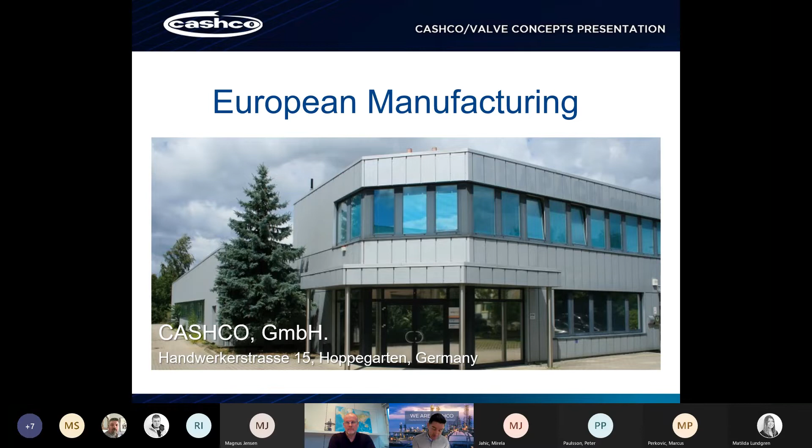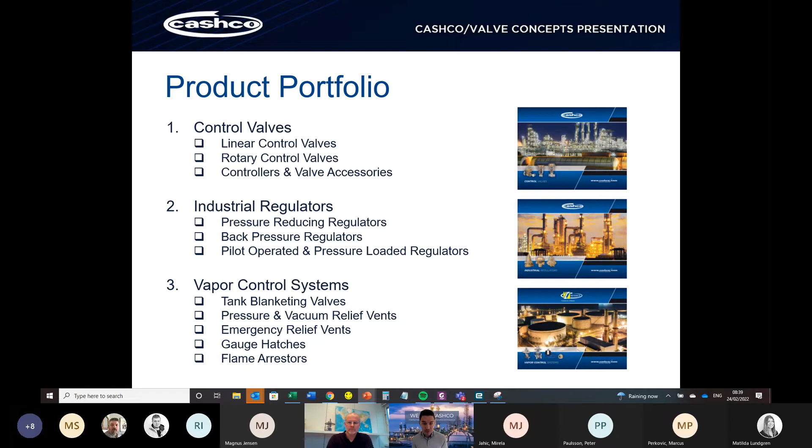So yeah, two facilities mainly across the world. On the video, that's from the US facility, we're manufacturing control valves, linear and rotary control valves, and industrial regulators. The product range that we're going to focus on today is the vapor control systems, which involves tank blanketing, pressure vacuum relief vents, emergency vents, gauge hatches and flame arresters. Essentially, that's all our products that are associated with tank storage, controlling emissions, and protecting the tank.

Vapor control systems, unfortunately I had another video. Hopefully this works - I'll stop it after a few seconds and you can let me know if you can hear it, or I can narrate over it.

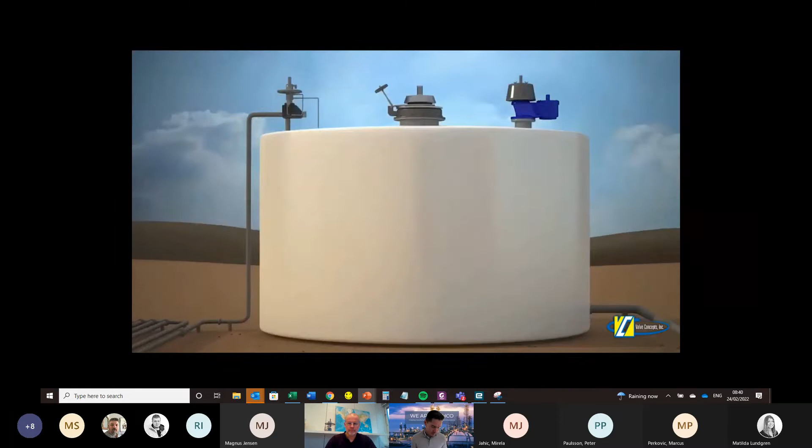You hear that? No, sorry, it's no sound. Okay, no problem, I can talk over it.

The intention of the video was to show you the equipment in situ on a storage tank. Going left to right, we've got the tank blanketing valve, emergency manway in the middle, and on the right hand side, a pressure and vacuum relief valve. The idea of this equipment is to work together to protect the storage tank.

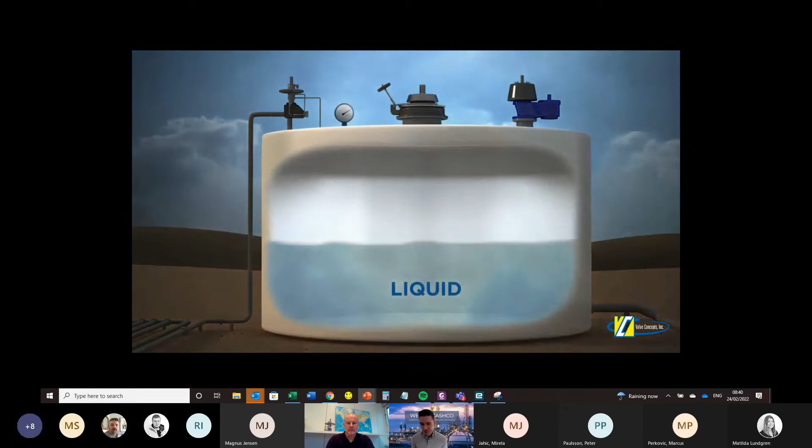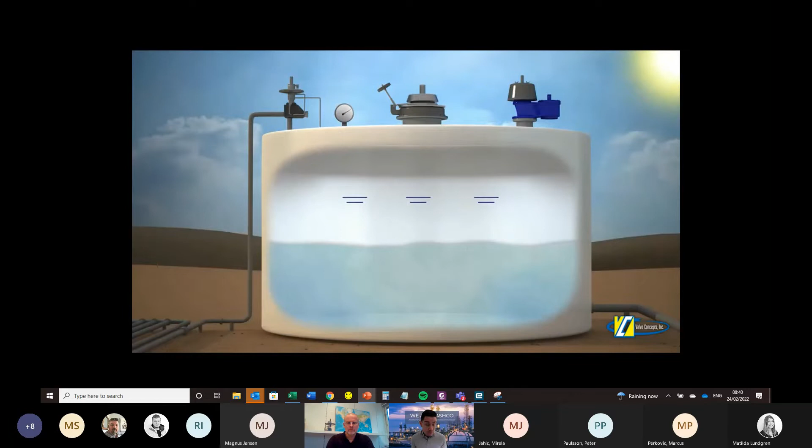As most of you know, there's liquid stored in the storage tank with a vapor space above it. Changes in temperature can increase or decrease the pressure in a storage tank. Throughout the day, if the product's heated by the sun, that increase in pressure will build to the point where you reach your breather valve set point. This allows the vapors inside the tank to breathe, helping to protect it from overpressure. Also, when you fill the tank, the vapor space decreases, pressure increases, and it needs to escape. That's essentially the role of a pressure and vacuum valve.

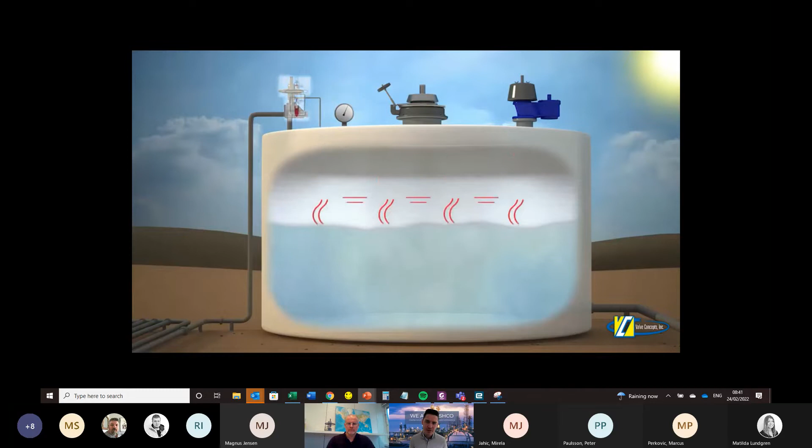You'll see the vacuum side working now. As you're emptying the tank, or as it cools overnight, the pressure will drop. On this tank, we have a nitrogen blanketing valve. As pressure drops, what would normally happen is air would be drawn in through the vacuum side of the valve. Some tanks are fitted with nitrogen blanketing valves, which at this point would push nitrogen into the vapor space of the tank. There are various reasons why you'd want to use a nitrogen blanketing valve rather than just bringing air into the tank, which we can touch on later.

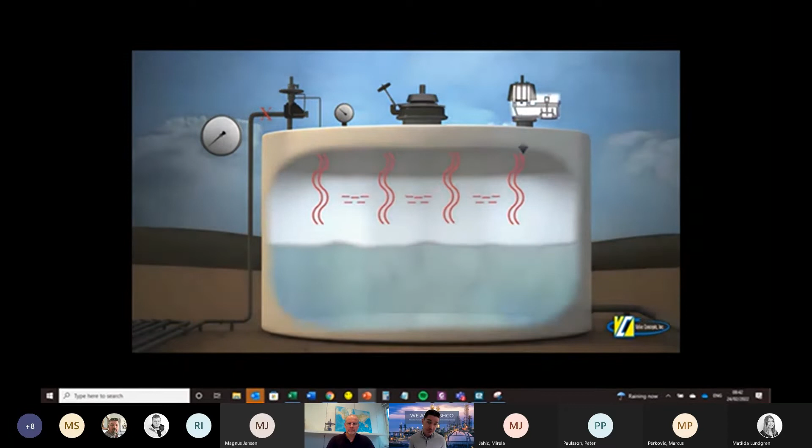You can see that if there is no nitrogen there, with the cross, the pallet on the vacuum side of the valve would lift and allow air in.

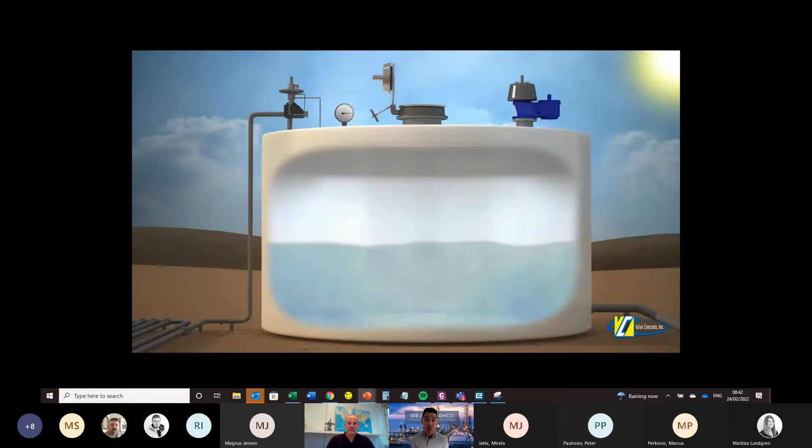The emergency vent is essentially just that, for emergencies. So if you had a fire around this storage tank and the product was heated up quickly, the vapors created are much greater than what can be handled by the standard pressure relief valve. That emergency manway flips open, allows the excess pressure to escape, and it's only there to prevent the tank from overpressurizing and essentially exploding. We'll touch on the products in more detail further into the presentation.

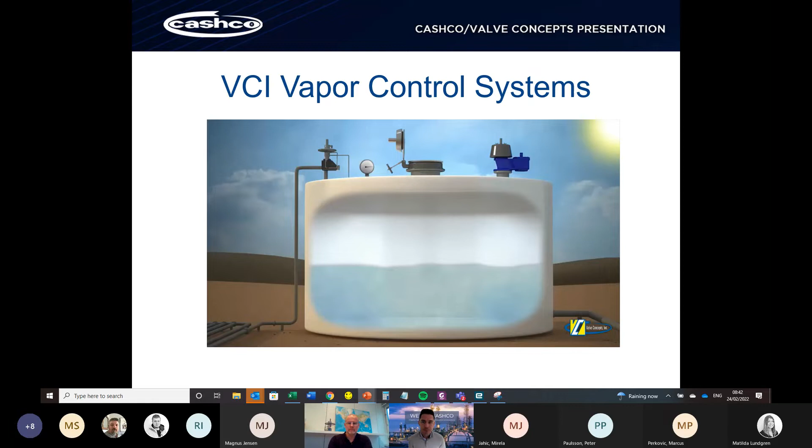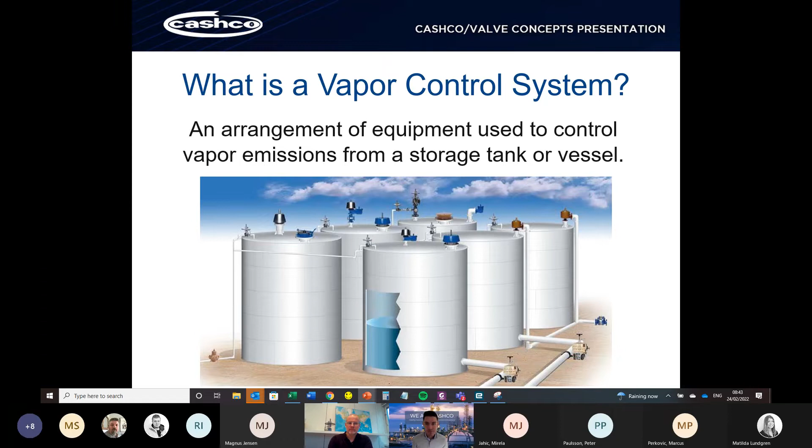So what is a vapor control system? As I touched on, it's an arrangement of equipment that helps to protect the tank and reduce and control vapor emissions. So why do we need pressure and vacuum protection? Well, as we said in the video, they help the tank to essentially breathe during filling and emptying.

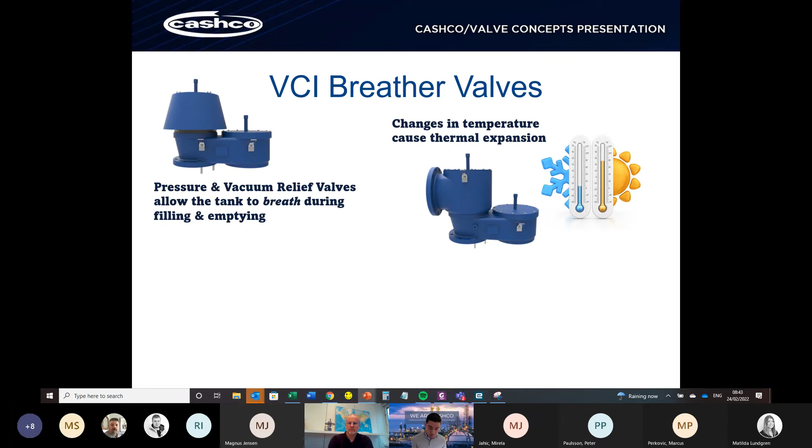As the temperature increases or decreases through the day, the pressure will do the same. That's called thermal expansion, and the valve operates to help protect against that. Most storage tanks are designed for very low vacuum pressures.

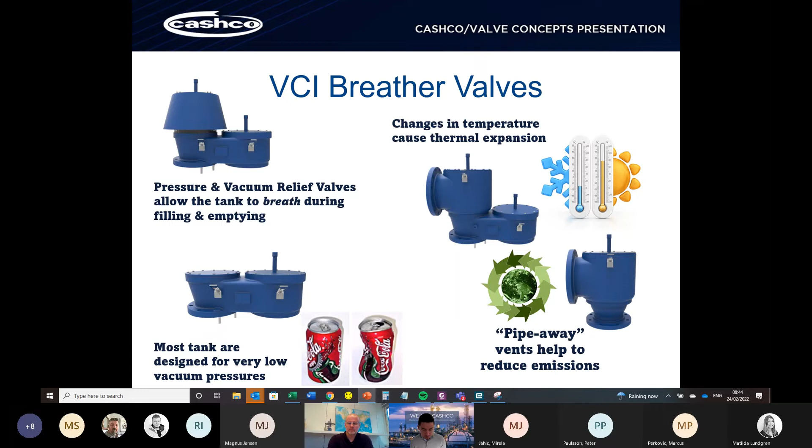How does the valve work? It's quite a simplistic device. On the left-hand side, you've got your pressure pallet that's sat on a stainless steel seat. That pressure pallet contains a diaphragm and backing plate, and we've designed that to try and be as tightly closed as possible up to the set point. ISO sets out some standards for that, which we'll talk about on the next slide.

Most of the valves we sell into this application are what's called weight loaded. So on top of the pallet, you've got either stainless steel or lead weights, which create the set point. Similarly on the vacuum side, on the right hand side, it's a similar design, weight loaded in this case, and both operate as you saw in the video. As the pressure increases, the pallet on the left hand side will lift; similarly on the right hand side for vacuum.

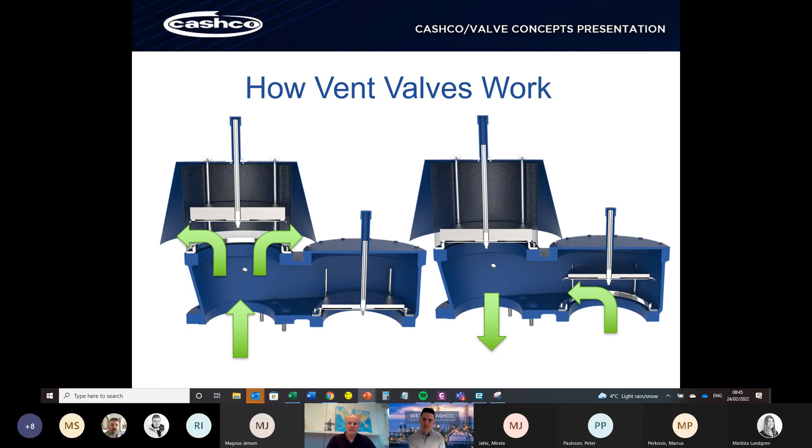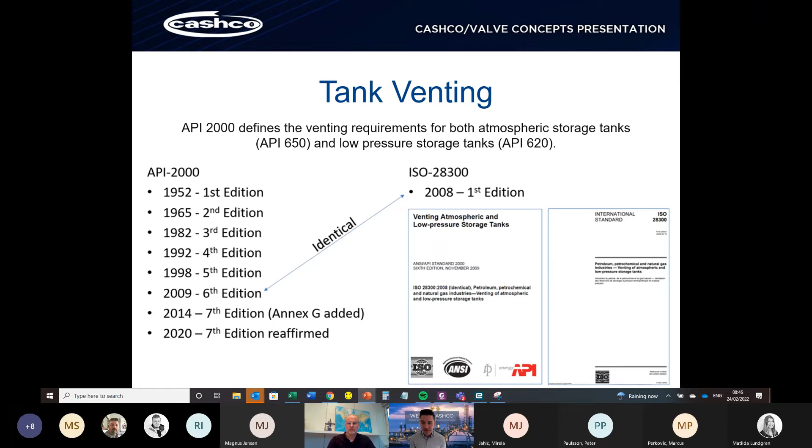As I mentioned, it goes through all the different requirements for atmospheric storage tanks and covers nitrogen blanketing tanks as well on the back pages of that. It's quite a useful document if you're involved in tank storage. Not the easiest of reads, but good information.

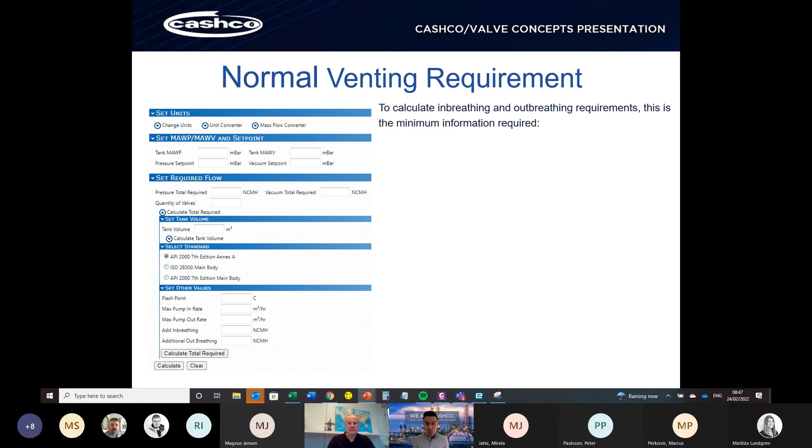So still on normal venting, the image on the left-hand side is taken from our online web sizing program. That's accessible to everybody via the website. It's a really useful, powerful tool that allows you to go on and just do primary sizing specification of a valve. Obviously, we'd be happy for you to, and expect you to, come to us or Raman as the experts and run through this or confirm your thoughts. But if you're just looking to check, is my valve suitable? Do I have the right flow rates? It's a good tool. When you're completing this, there's minimum information that we need for sizing a valve.

The first thing is the design pressure of the tank. Obviously, you can understand why - we're trying to size a valve here that will protect that tank. So we need to know what it's been designed for.

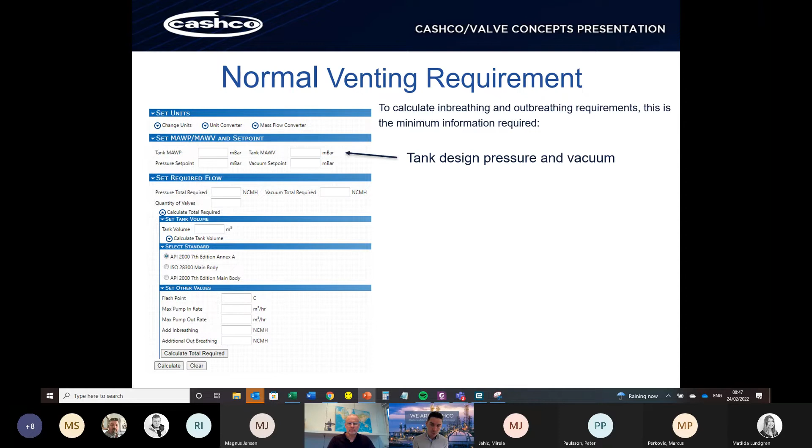Looking at the tank volume, or if that's not known, you can actually put in the tank dimensions and it will calculate the volume for you. That's essential when we're looking to calculate how much vapor or air we need to expel.

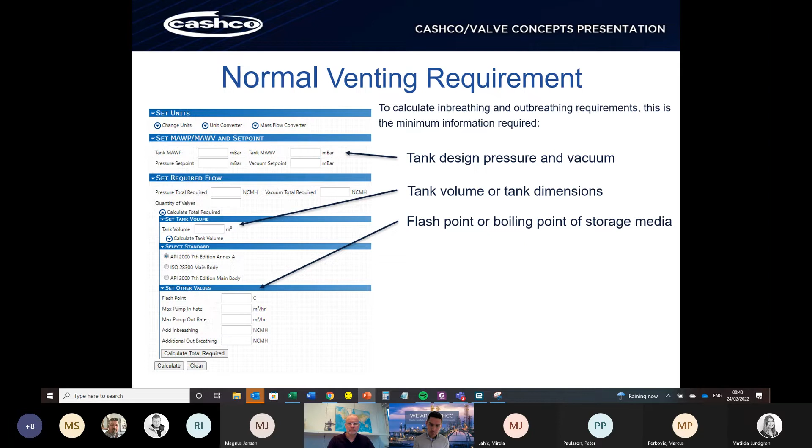The flash point or boiling point of the media is also important with the calculation. When we're looking at the pumping in and pumping out rates, we need to know if that product is going to flash at all. So essentially, those are the 5 criteria for sizing a pressure vacuum relief valve. The rest we can work around and work with you.

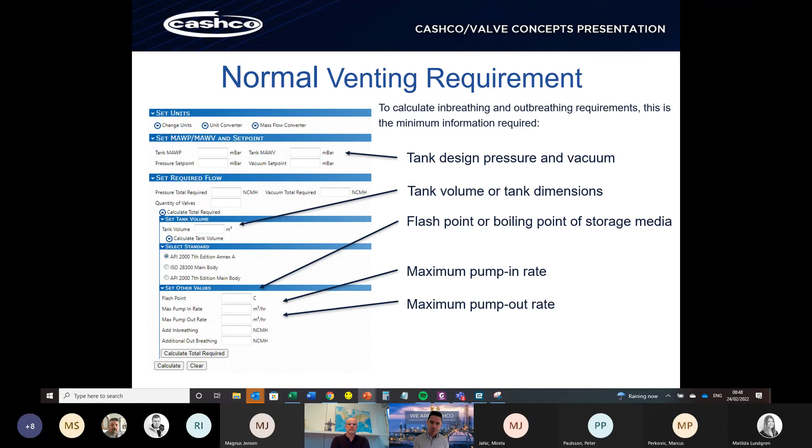This is quite an old slide now, but I think it's still quite relevant. Most tanks do have pressure vacuum relief valves on them now, but not all of them.

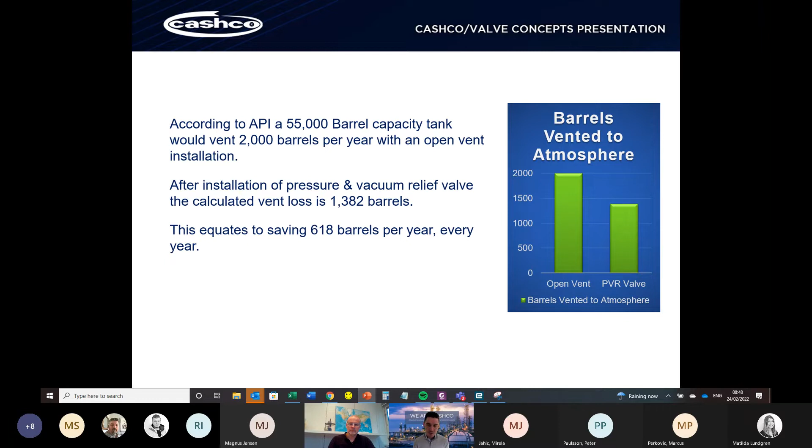API did a calculation to show that a 55,000 barrel capacity tank would vent 2,000 barrels per year if it just had a standard open vent on it. By installing a pressure vacuum relief valve, that was reduced to 1,382, which might not seem significant, but you're actually saving over 600 barrels a year by fitting a PVRV. When you think that the average oil price last year was $55, the total yearly saving just on those 600 barrels is $34,000. So essentially a pressure vacuum relief valve can pay for itself in less than a month.

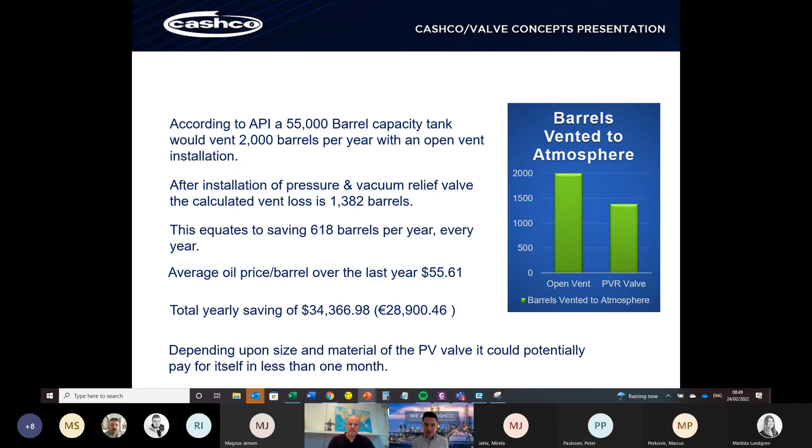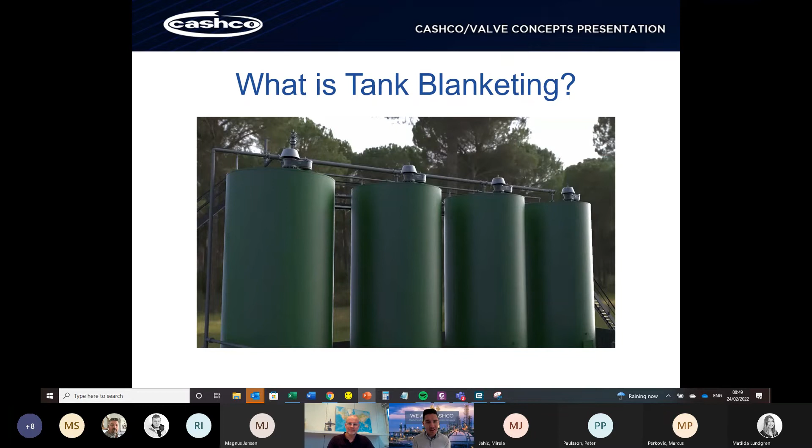So what is tank blanketing? This is a really well animated and narrated video. Unfortunately, you can't hear it, but I'll play it and I'll talk through it.

So this is our model 1078 tank blanketing valve. How it operates, as we said, is to inject either nitrogen - it doesn't have to be nitrogen, whatever gas you wish to use - to create a blanket on top of the vapor.

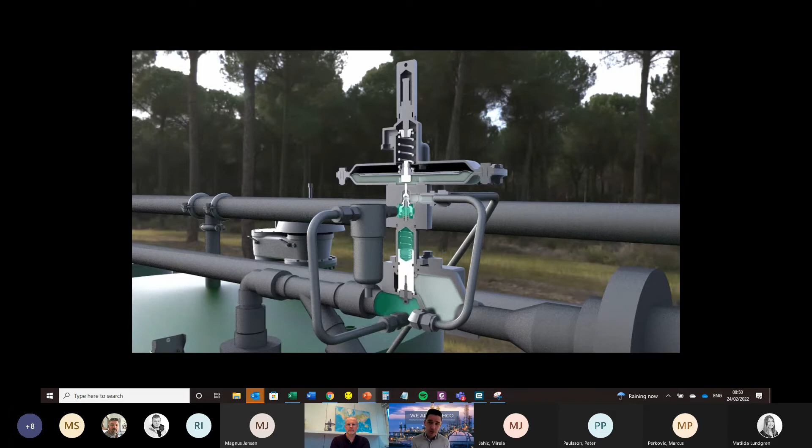It's a very simple design, very reliable. You'll find that in Europe, I believe this to be the best blanketing valve on the market due to its accuracy and reliability.

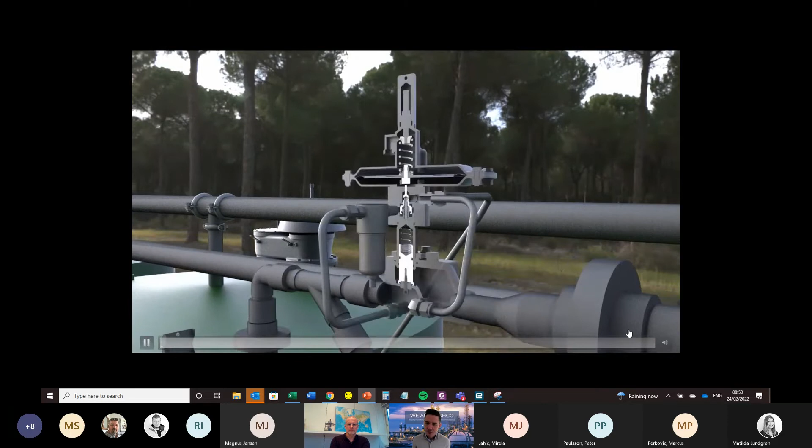How it works is you can see that traveling - what's that, it's the pressure traveling up the sensing line, we call it. That's sensing the pressure inside the tank. Some regulators actually sense the pressure in the body of the regulator, and you're not getting as much accuracy at that point. So this sensing unit goes right into the header of the tank.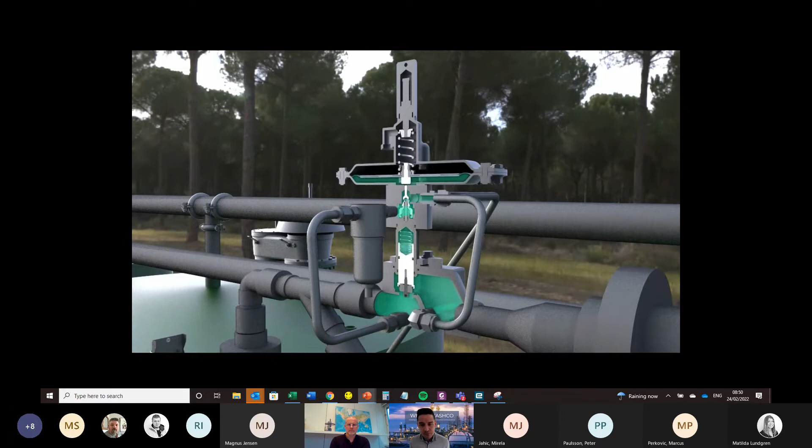As that pressure decreases, the pressure underneath the pallet in the pilot also decreases. That creates the spring to open the valve and therefore push nitrogen into the top of that tank. Obviously, as that pressure then will increase due to the nitrogen, the sensing line will sense that increase in pressure and it will shut the valve off.

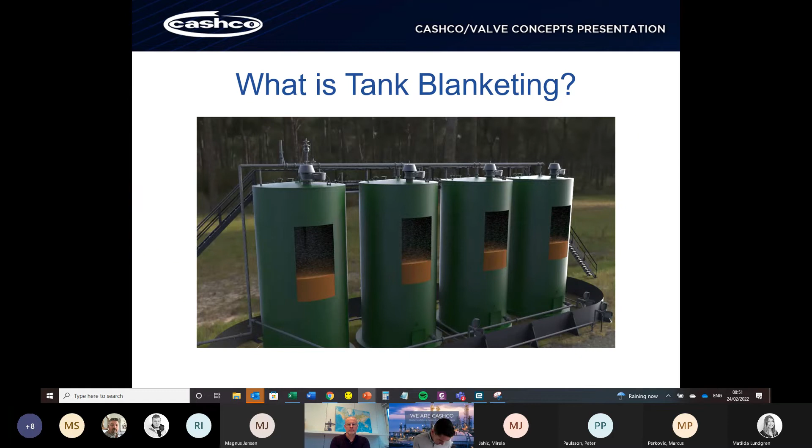They're highly accurate pieces of equipment. Very, very easy to maintain. As I said, they can actually be done in situ - you can calibrate them in situ as well on top of the storage tank. So we'll look a little bit more at the product itself.

So why do you fit nitrogen blanketing? Well, you're keeping air and moisture out of the tank. One of the customers we use produces sugar, where you don't want any moisture mixing with the sugar, so they push nitrogen into the vapor space to take away that moisture.

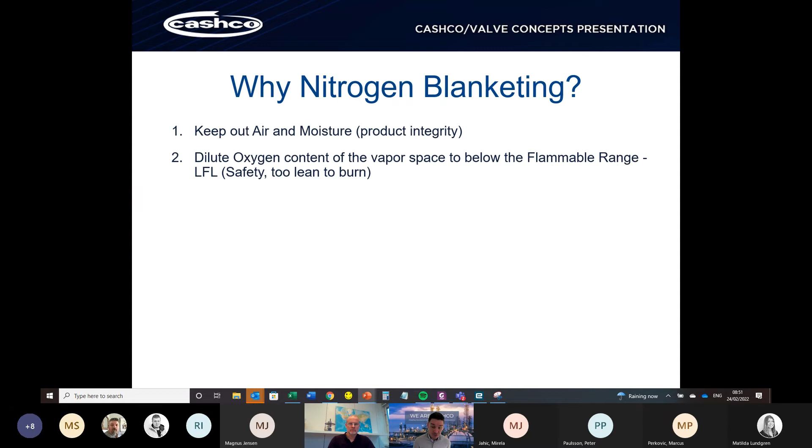You can dilute the oxygen content of the vapor space below its flammable range, so you're making it inert. That's good if you're dealing with flammable products. You can also enrich that vapor space and take it above its flammable range if you want to push in a flammable gas, whatever you're using. So you can use it both ways.

It can dilute toxic vapors for safer emission levels. Everyone's talking about the environment now, and there's a big push on valve leakage globally. So this is becoming a very, very popular product for us and for you as a customer to use.

It also helps to prevent internal tank corrosion. If you've not got air in there and moisture, obviously you've not got that possibility for corrosion.

As I said, the requirement for tank blanketing can be found in the ISO 28300 standard, Annex F, which is an informative standard. It gives guidance on how you use tank blanketing, what the requirements are, and what extra protection is required. Again, we don't expect you to go away and read all that - that's just the standard we adopt as a manufacturer for specifying.

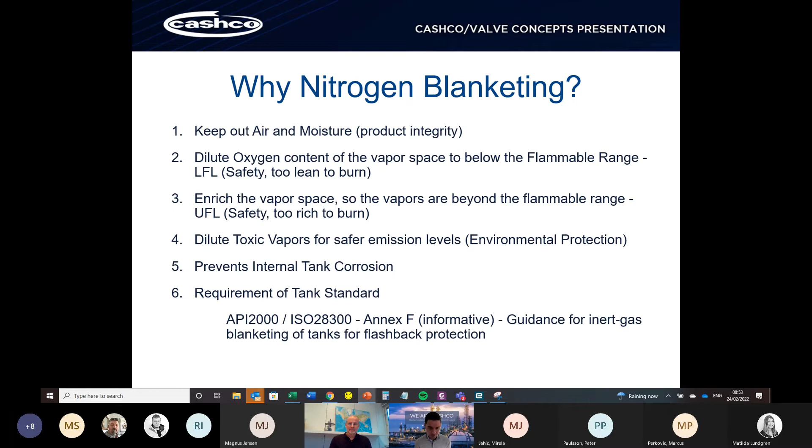So, important factors to consider when fitting nitrogen blanketing. The first is that it's got to exceed the breathing requirements. When you're pumping out of that tank, we calculate the breathing requirements, and the amount of nitrogen that valve lets in has got to exceed the in-breathing requirements before you allow air into the tank. Otherwise, it's mitigating everything you're trying to achieve.

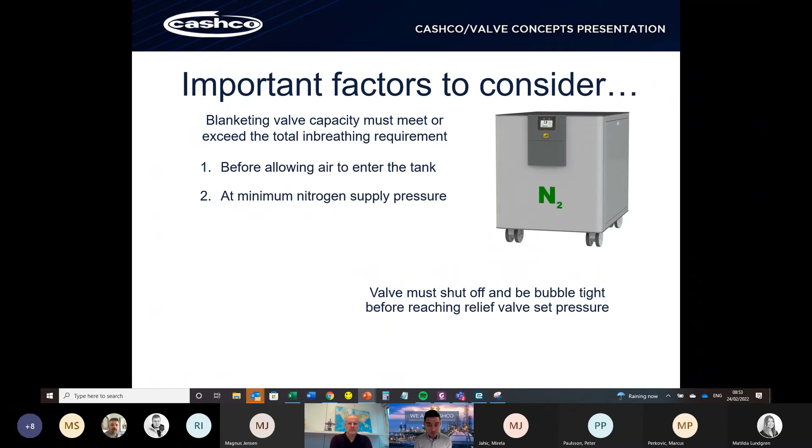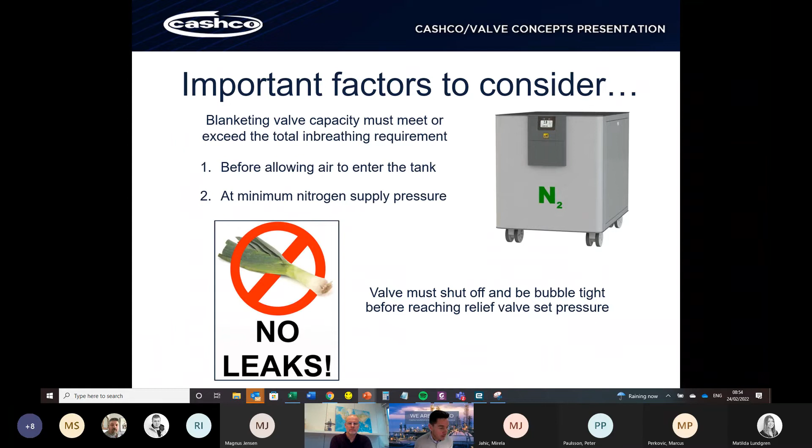It must also do that at the minimum nitrogen supply pressure, so if you came to us for a nitrogen blanketing valve, we'd be asking what your supply pressure is. The valve must also shut off and be bubble tight before reaching the relief valve set pressure. As I mentioned at the beginning, we're looking at a control system, and we need to know how they operate with each other. If they're not bubble tight, you could get leaks on the valve itself.

So we have two models for this. On the left-hand side is our model 1078. As I've touched on, it's known throughout the world as effectively the best regulator on the market - unrivaled accuracy, very easy to maintain. Our valve is bubble tight at shut off. Some manufacturers go above set point; they have a closing pressure. We don't - what we say it shuts at is bubble tight.

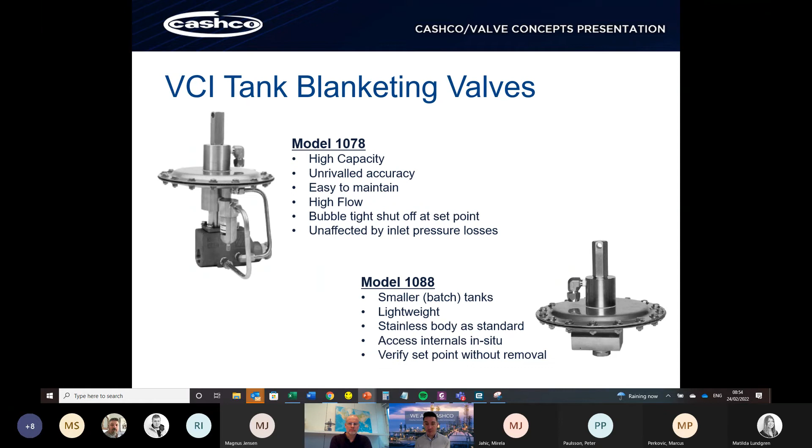For smaller batch tanks, we use our model 1088 on the right hand side. It's a bit more lightweight, easier to access. The capacity is obviously reduced in that unit, which is why it's for smaller tanks.

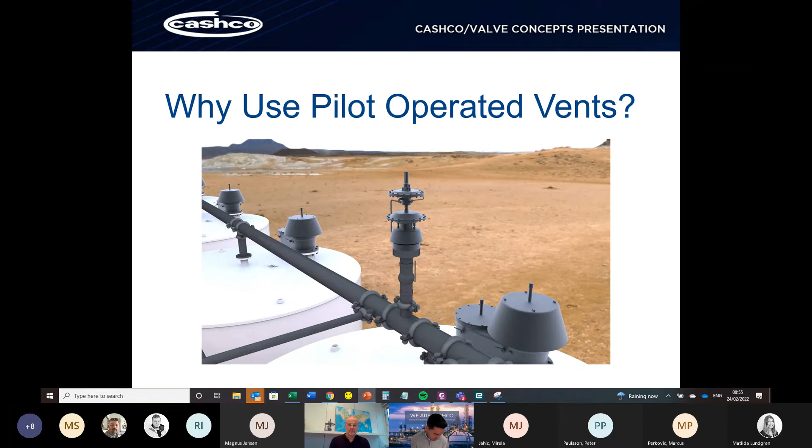So moving on swiftly, we're looking at pilot operated vents. If you were looking for more accuracy than your standard pressure and vacuum relief valve, this is the unit you'd be looking for.

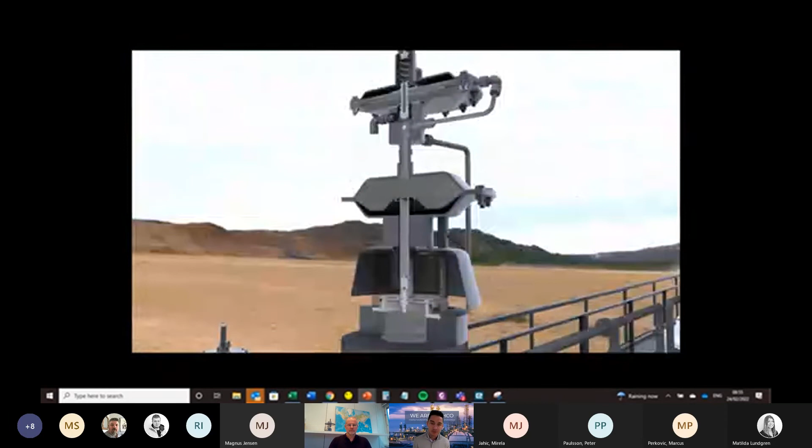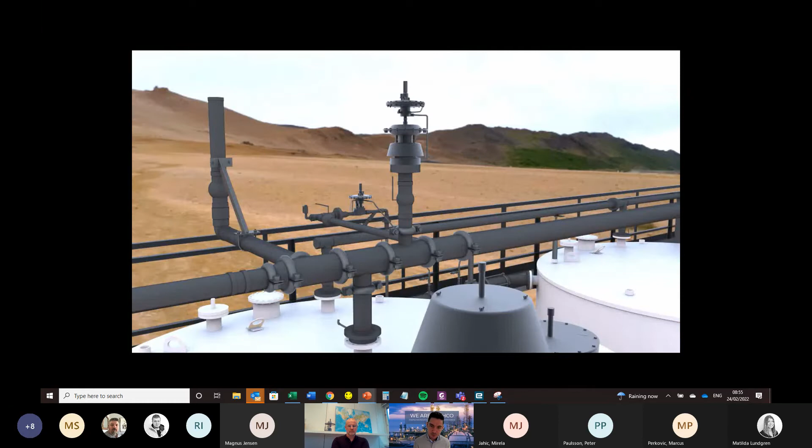Using pilot operated technology, it's the most precise way to achieve your set point. With a weight loaded valve, once it reaches set point, the pressure will increase - you have an overpressure to achieve the flow. With a pilot operated valve, you don't have any overpressure. As soon as this hits set point, it opens fully and you get full flow through the valve.

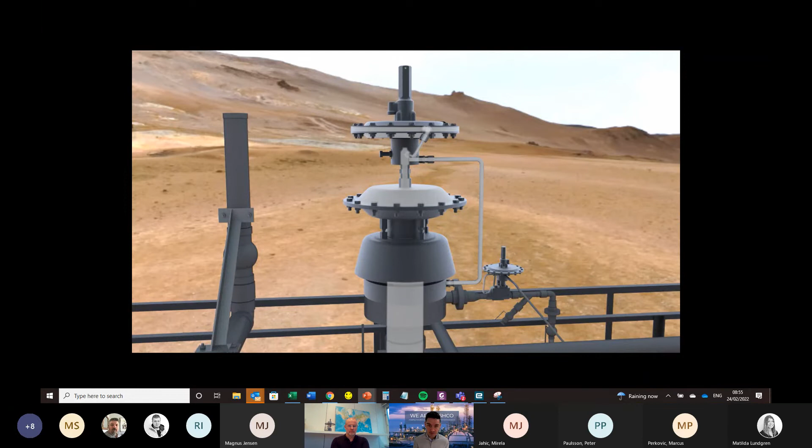The way it operates, you'll see this sensing line that puts pressure above the diaphragm where the seat is, and below the diaphragm on the pilot. What that helps achieve is as that pressure increases, pressure on the seat in the valve also increases, so as it gets closer to set pressure, it becomes tighter. So you get no leakage through these pilot operated valves.

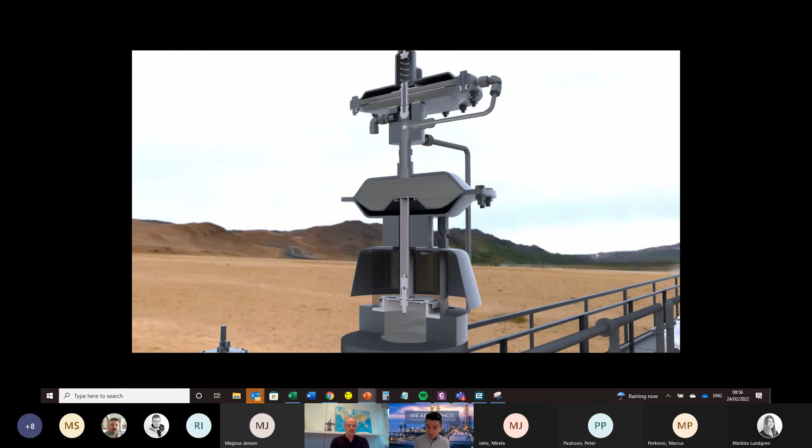So if you are using a particular product that you really don't want to escape, you don't want to vent before set pressure, pilot operated technology is the way to go. Also, if you're looking for full flow very quickly, such as LNG tanks where they're offloading at high speed, this is the unit to go for. As soon as it hits set pressure, you get full flow, full lift.

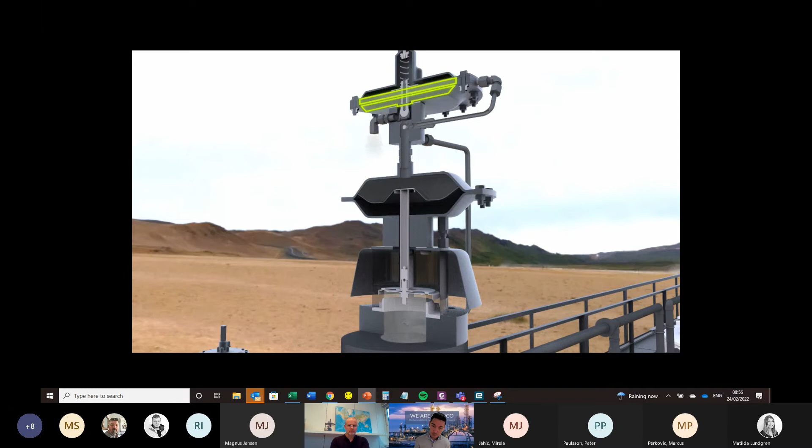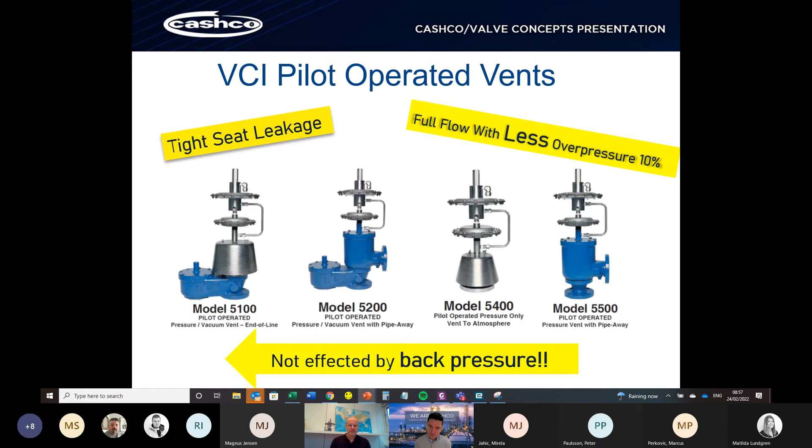So as we've said, what do pilot valves offer you? You've got tight seat leakage or no seat leakage, full flow with less overpressure. You're generally looking at anything up to 10%, you don't even need 10% to be achieving full flow. And they're not affected by back pressure. So on the full blue units, the model 5200 and 5500, where they're piped away, if you add a back pressure in your system, these would not be affected by that. Whereas with a weight loaded unit, that's something you've got to consider.

So these have zero leakage up to 99% of set point. API actually allows for up to 5 standard cubic feet per hour at 75% set point for weight loaded. So you can see the difference. At 75% of set pressure, a weight loaded valve, and that's anybody's, is allowed to leak up to 5 standard cubic feet. So at 80, 90%, it's leaking even more. It's essentially working, it's operating. Pilot valve doesn't do that. At 99% of set point, it's totally closed.

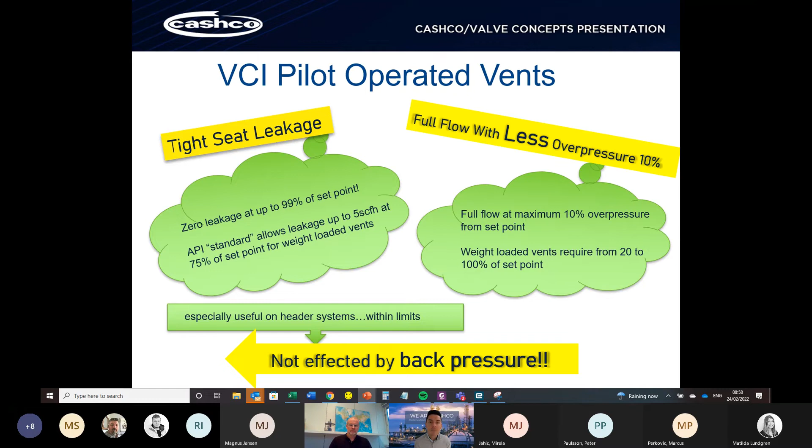Full flow at 10% overpressure, as I mentioned. The weight loaded vent, generally looking to start at 20%, but up to 100% overpressure at set point. To put that into figures for you, if you set your valve at 10 millibar, you would be looking at a minimum of 12 millibar to get your flow up to maybe 20 millibar. And not affected by back pressure, as we said, especially useful on header systems. Emergency venting.

So why is emergency venting required? As we talked about at the beginning, generally for fire engulfment of storage tanks. So these are much bigger openings. These allow for much greater flow in case of fire conditions, quickly heating up the products in the tank and creating a lot of vapor. We do different arrangements of these, from standard weight loaded on the left hand side. We operate spring as well if you've got higher pressures, and we can also add additional vacuum capacity to this unit, which again, when we're looking at full vapor control systems, offers us some good advantages if you've got high vacuum requirements.

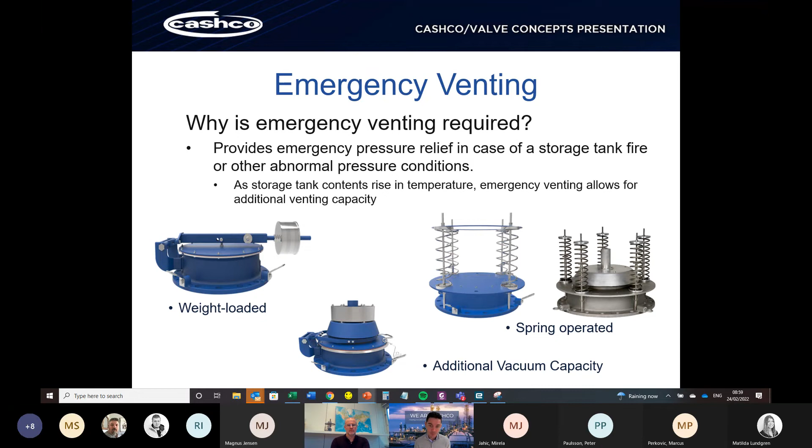What I would say at this point is, if you are looking to specify or size tank storage equipment, it's essential really that you go to the manufacturer with all the equipment and size it as one. It should really be looked at as a complete system, whoever you're working with, because these pieces of equipment do conflict with each other, especially if they're not specified correctly.

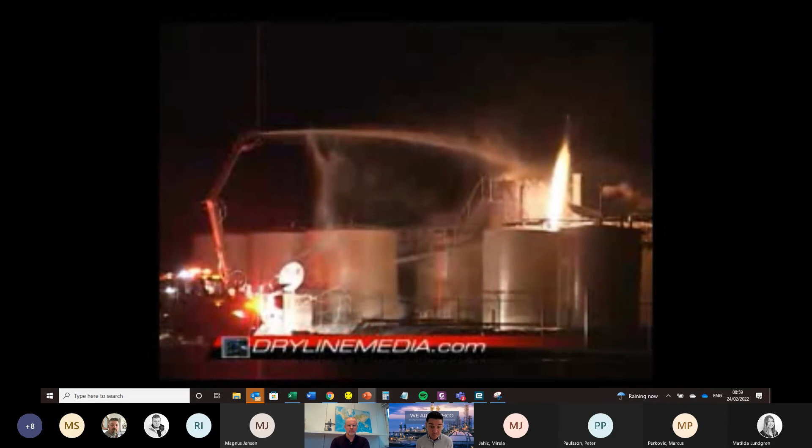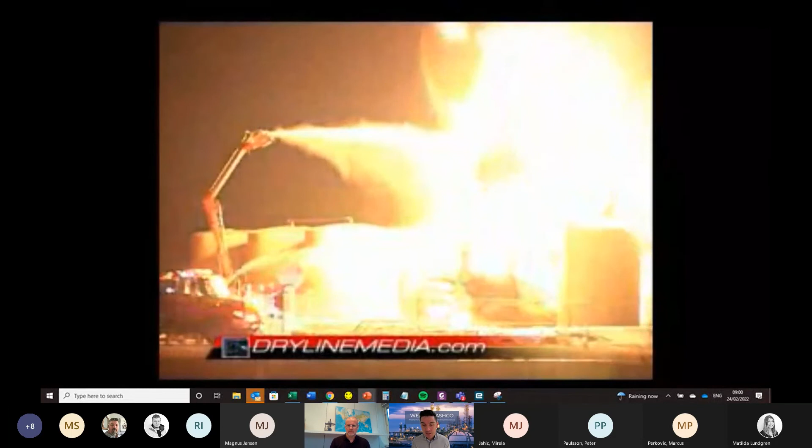Another nice video, we don't actually need the sound for this one. So here you've got a fire engulfment scenario. What's happened is the vapor is trying to escape from this storage tank under high pressure. That's through a normal relief vent. It's ignited because of the fire in the surrounding area. What we'd like to see now is an emergency vent open and let the pressure escape from that storage tank. This tank doesn't have an emergency manway fitted, so the pressure is building and building. And essentially, if the pressure's got nowhere to go, it's going to lift the storage tank with a catastrophic event.

Moving on to just some of the tank furniture, tank fittings that we also manufacture. We've got relief vent gauge hatches. These allow you to access the tank for dipping, sampling, and also, just on the top left hand side, that's our emergency manway in a GRP model. We do plastics, we can do HALAR. We have various options for those, again, if your product is particularly corrosive.

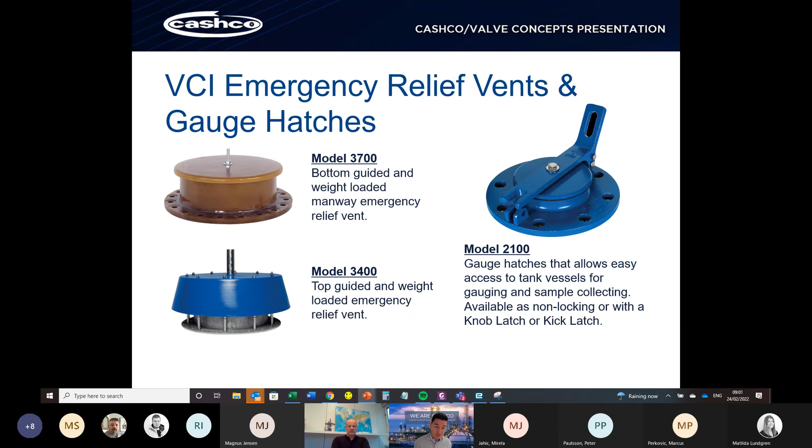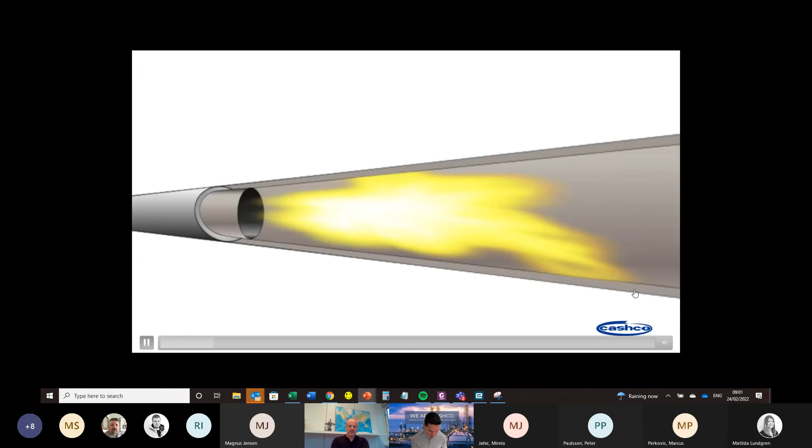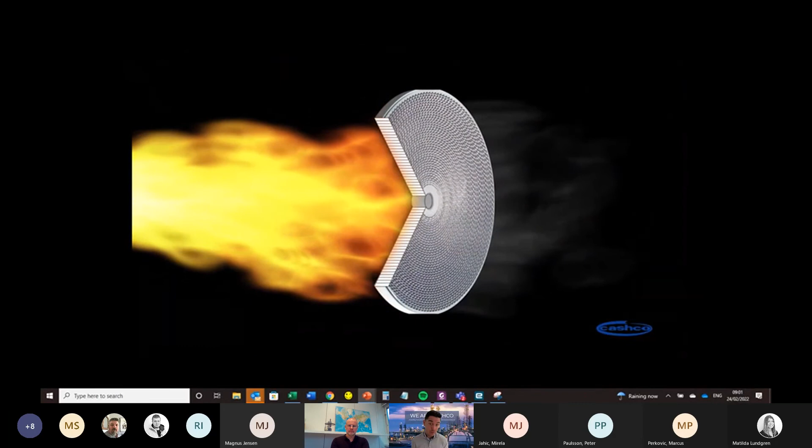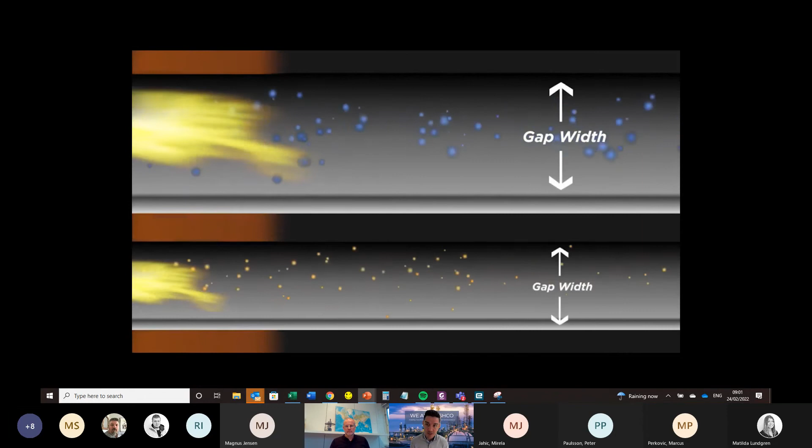Moving on swiftly, we're going to look at flame arresters. So flame arresters are static devices that sit within pipelines or vent pipes and stop any potential flame from travelling down back into the supply area and creating a much bigger event. The static flame arresters operate through this crimped element, which has channels going through it, essentially stripping the heat out of the flame. Now, as a manufacturer, we measure the gap width, known as the MESG, of that crimp. That allows us to specify the flame arrestor depending upon what gas you're going to be using.

Quite a quick video, quite a difficult subject to take in if you've never dealt with flame arresters. Essentially, they're allowing gas to flow, but should that gas become ignited, they're stopping the flame travelling back. I hope that sort of covers it.

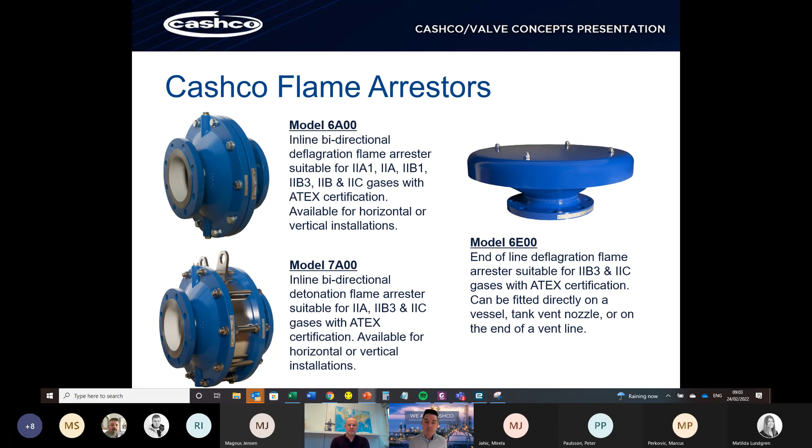Essentially, it's about where they're situated relative to the ignition source. A deflagration arrestor has to be fitted close to any potential ignition point. If there was a flame, it would stop that deflagration flame. If you can't do that because of access or pipe work, you need to fit the flame arrestor.

A long way from where the ignition could happen, then you would move to a detonation arrestor. As I mentioned before, the crimp technology in the middle of these is what's doing the work, and you can see on the detonation unit that's much more substantial.

So we like to offer a deflagration unit, that's the intention, but if not, we do have a detonation unit that would also work.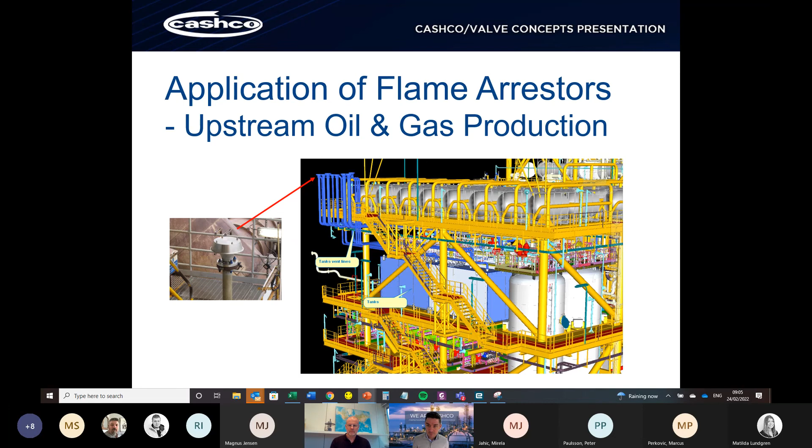On storage tanks, you may see a flame arrestor through the PV valve. If you're looking to capture those vapors, as we spoke about in a vapor recovery unit, there would be a detonation flame arrestor there, because essentially the ignition source would be the vapor recovery unit, and that could be 50 meters away, down your terminal.

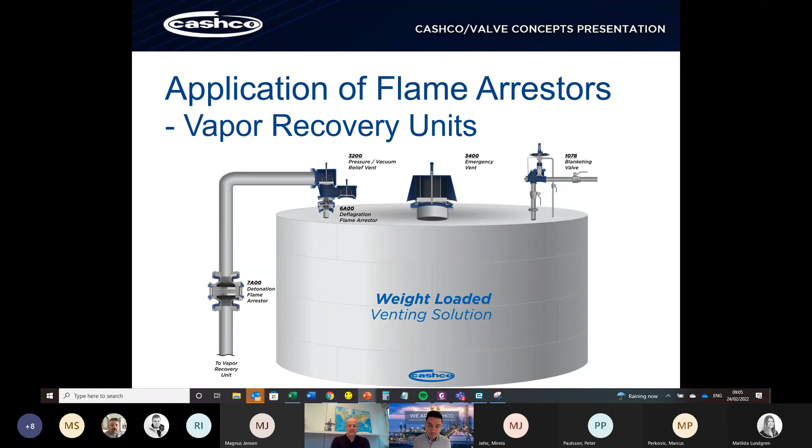Flare systems all have flame arrestors installed on the gas supply line. Should you get a backfire or the ignition going back towards the gas supply, that flame arrestor is your protection device to stop it traveling back further down the gas line.

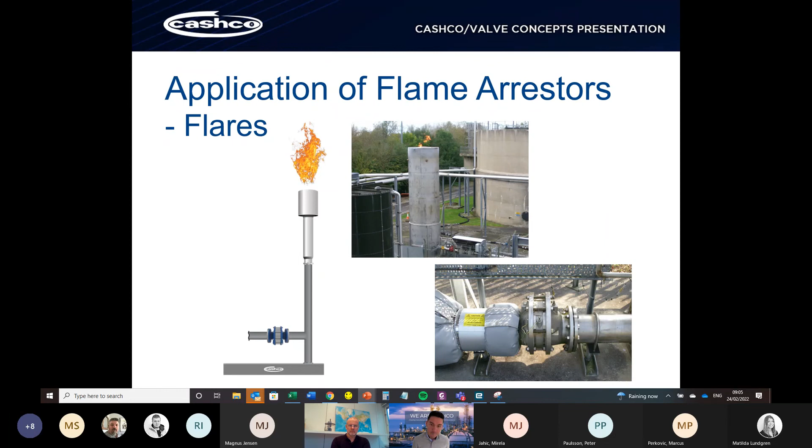And finally, well, there are lots of applications. This is a blower or fan.

If customers need to ATEX rate their fans for flammable atmospheres, they would fit our flame arrestors, and they go away and do secondary tests, and then that fan would be classed as an ATEX rated fan. We work with manufacturers, with OEMs, to help supply the best technology and sizing for these applications.

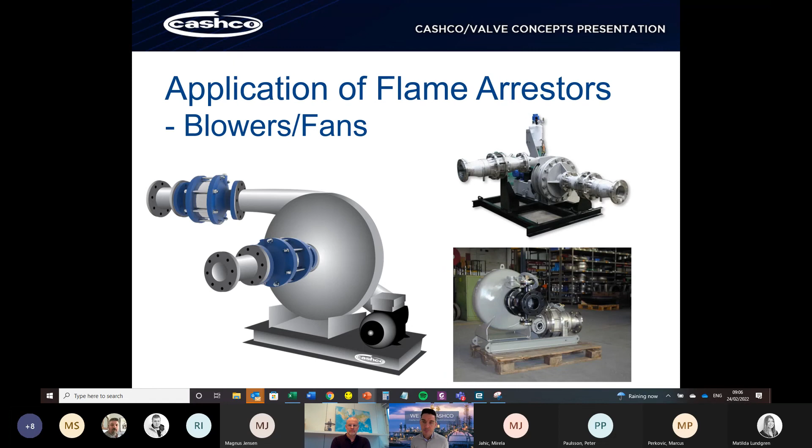So just to summarise on Cashco, as you saw at the beginning, we have extensive manufacturing experience from the US and also now in Germany. All our equipment is API certified.

We follow those standards when we're checking the leak rates, flow paths and so on. Web-based sizing programs are available based on API 2000.

We have localized aftermarket support. Raman are actually our first company in Europe to be accredited as a Cashco repair centre. So if you've got any issues with your valves or regulators, we can work together with Raman to hopefully fix those more locally for you guys.

Documentation, obviously, is a big part of everything we do. Functional test reports, calibration certs, and so on.

Wide installed base. We may have worked with some of the companies you represent globally. As I say, we've been operating for over 100 years, so we've got a wide installed base of our products.

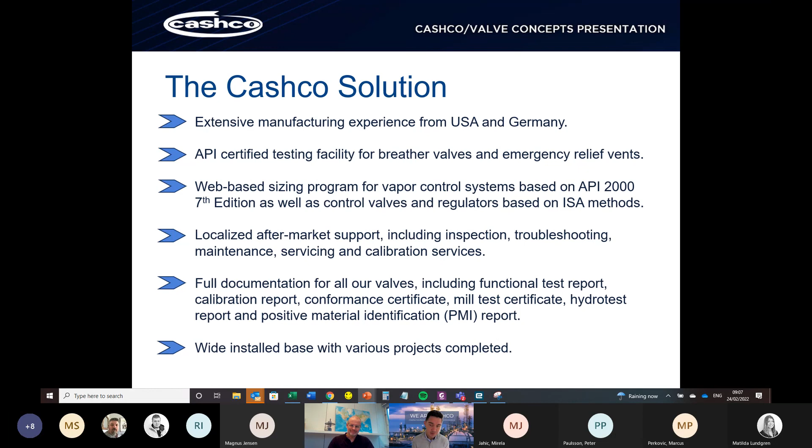And that's me, thank you, Krista. Thank you very much, Kevin. Very well performed, and you are an excellent narrator of videos now.